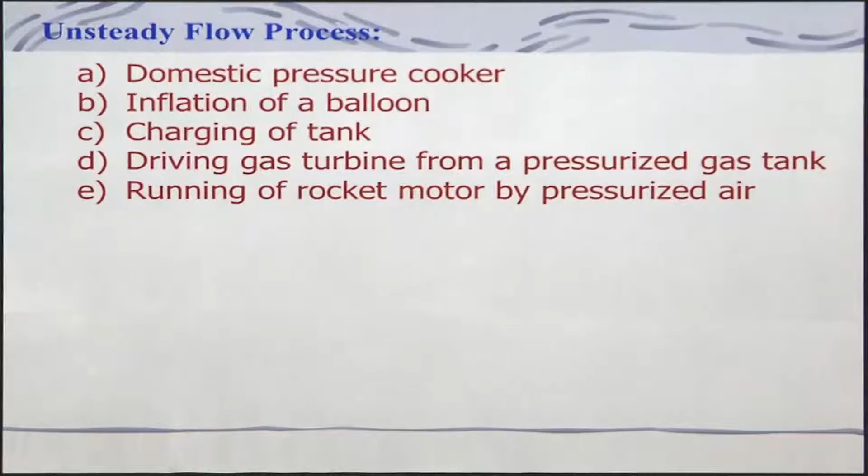So if you look at this typical pressure cooker being heated with some heat, and this is your pressure regulating valve, which you might have seen at home. Whenever the pressure builds up, because heat is there and let's say you're boiling water with a vegetable, it will be vaporizing, so these are basically vapors.

The pressure will build up, and when it reaches more than the weight you put on it, the pressure applied by the vapor creates a force higher than the weight, then the petcock or pressure regulator, which is weighted, will go up, and some amount of steam will be released. Then it comes back down, and again it builds up. So this is basically an unsteady process. Now this kind of thing we can apply in several other places.

You might be aware of a biogas plant, what we call gobar gas plant in village rural areas. Suppose I want to generate some gas, what will I have to do, and it should be at high pressure - how will I make pressure? There will be a dome, on which I put some weight, and the gas will be collected and the pressure will increase, and I can use that.

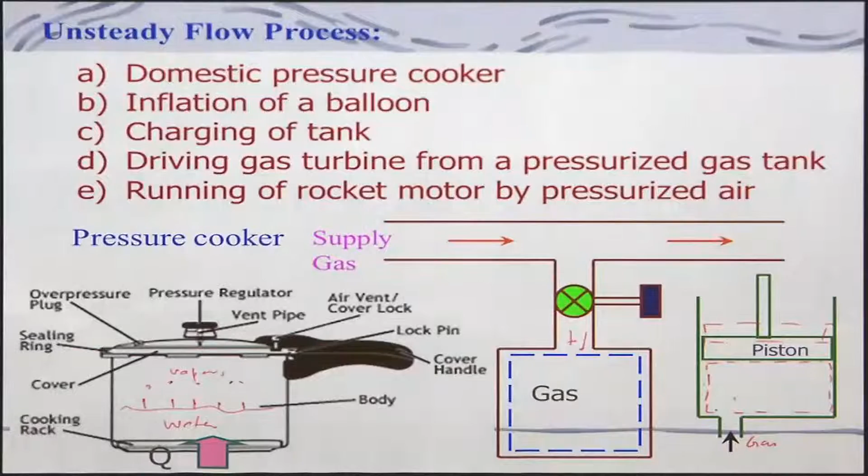And there is another thing coming up, basically the piston cylinder arrangement. Suppose there is a piston here, and you are putting some gas. In this case, if you take this control volume, it is changing its position as the gas is being filled and the pressure increases, so that piston will be moving. This is also another unsteady phenomenon which occurs in most of your automobile engines - air will be entering, and then it will be going out. So how we are going to model this is one question which we need to address.

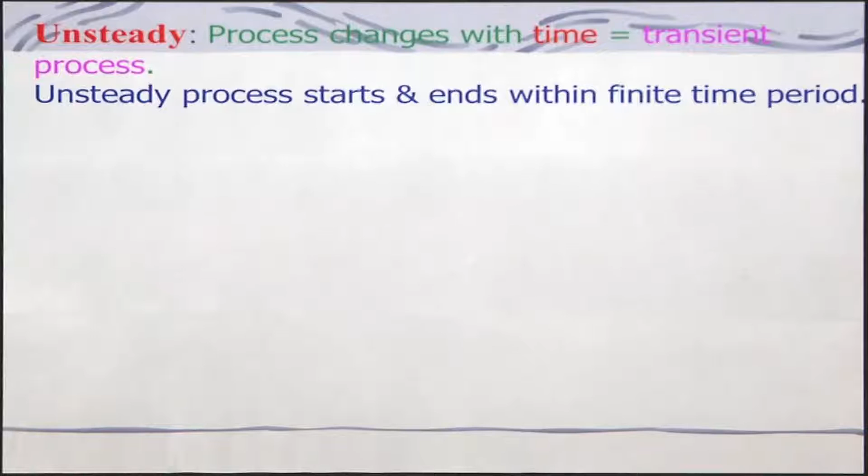So unsteady process means basically a process which changes with time, we call it also a transient process, and this unsteady process will be starting and ending within a certain finite time. It may be a few seconds, a few hours, or a few minutes.

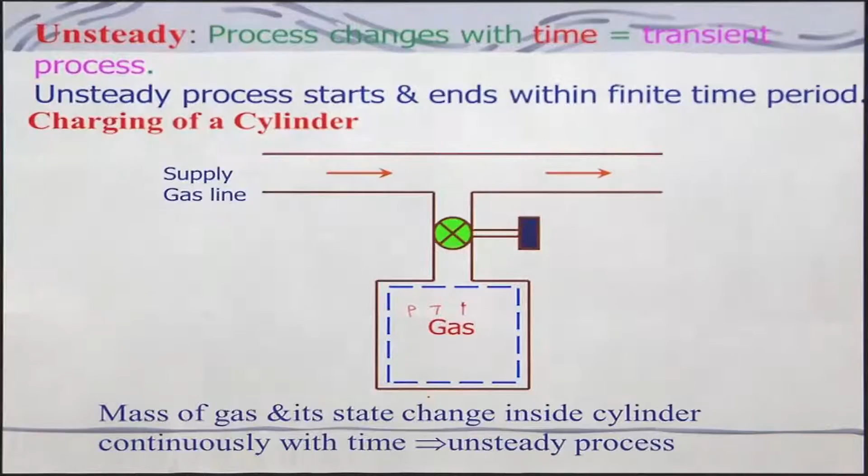As I told you, the charging of a cylinder is one of the examples one has to look at. In this case, the mass of the gas entering into this will be changing, and so also the pressure and temperature will be changing. If pressure increases, will the temperature increase or not - that one has to see. So basically the properties and the mass of the gas inside this cylinder will be changing continuously with time, and therefore we call it an unsteady process.

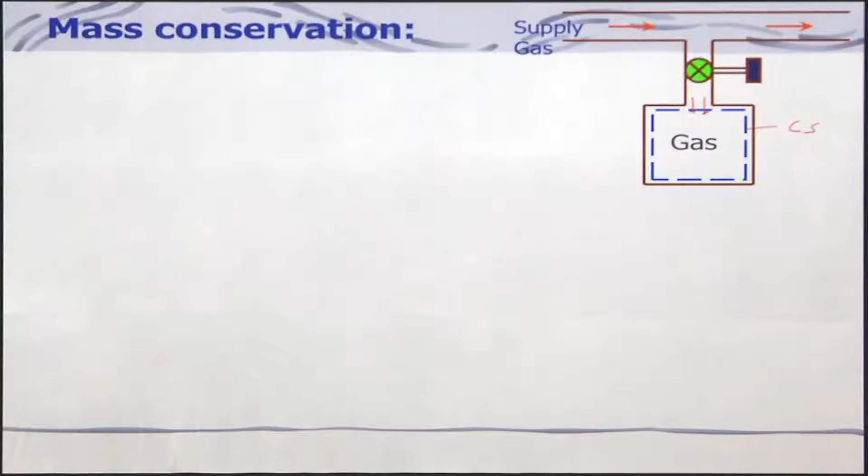So what we will do is apply basically the mass conservation equation. In this example of charging up a cylinder, I can take this as a control surface and this is my control volume. The mass will be entering here and it is not going out - this is my inlet, and there is no exit. So if I look at mass conservation, since there is no exit, this term will be zero.

Now similarly we will apply the energy conservation equation, which is for unsteady state. If you look at this term, in the steady state we had neglected it - this is your unsteady term. We had neglected this in case of steady state, saying it is zero, but here we cannot afford to say it is zero or neglect it - here we will have to consider that.

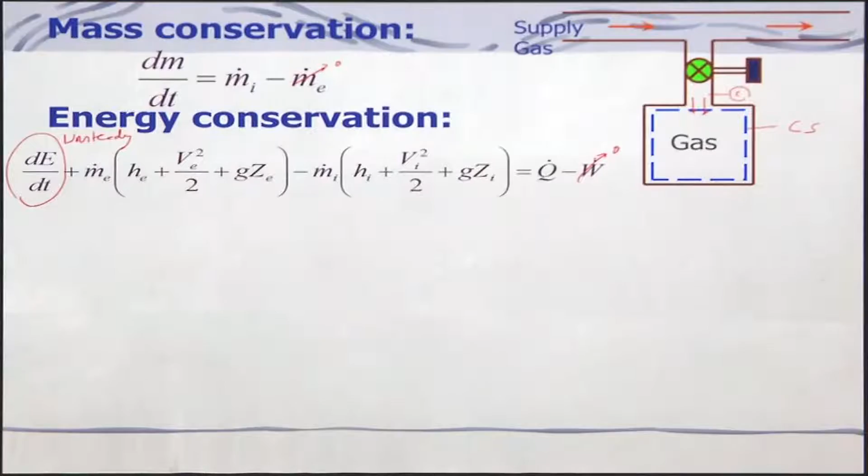And of course, if we consider in this case, is there any work done? There is no work done, it is a charging process, so this will be zero. We can assume it to be adiabatic, or we need not assume the process to be adiabatic. We will assume that the change in potential energy is equal to zero, for example this height is not really having much effect, so this potential energy change is zero. And we are saying the velocity with which it is entering into this chamber is very, very small - of course it will be finite, it cannot be zero, but it is small - so therefore the change in kinetic energy is basically zero.

We can write down the first law of thermodynamics for an open system: dE/dt minus m dot hi is equal to q dot. Here we are saying that it need not be adiabatic, but in some problems we may assume it to be adiabatic depending on the problem. Here we have kept that term with us.

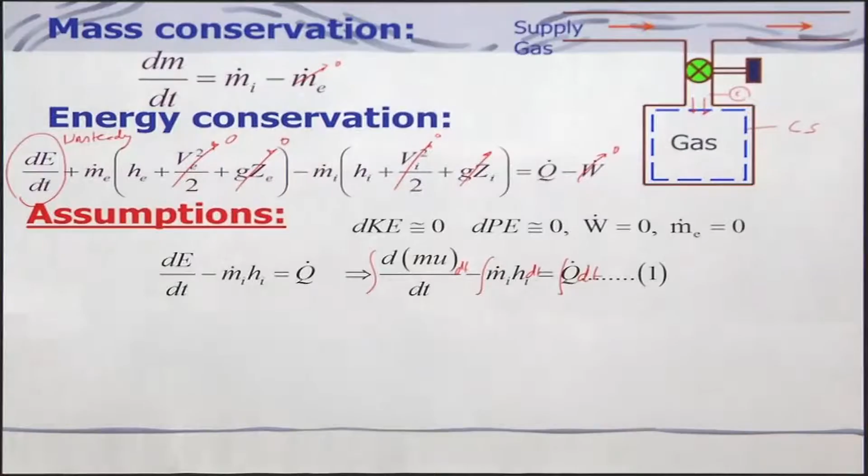Now we need to integrate this equation to find out. If I integrate this over dt, we can integrate between time 0 to t and see how we can change it. Keep in mind that m is the mass of the gas in the control volume at any instant of time, and U is the specific internal energy of the gas in the control volume at any instant of time, as already defined. So by integrating this equation, we get this.

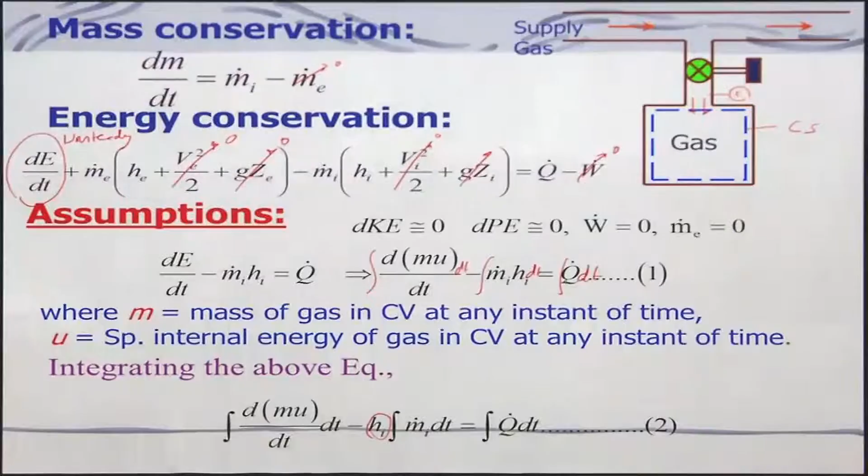Now we will have to see how we are going to integrate this, that is the important point. Keep in mind that in this term, I have taken the h, the hi, out. That means we are saying that whatever enthalpy with which it is entering the control volume is not changing with time. Is it a good assumption or a bad assumption? Because this supply is having a constant enthalpy, which is not changing, and heat loss is not really much, so there is not much change. Therefore I can take hi out, and we will look at each term of these and see how we can integrate.

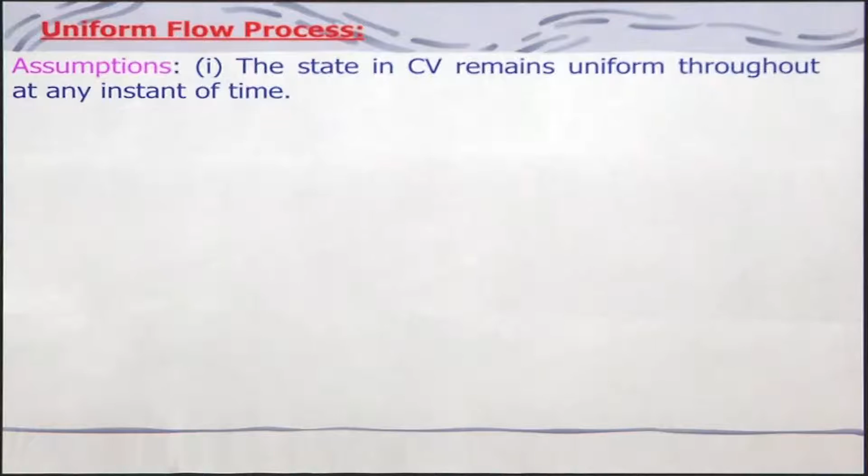Before that, we will consider uniform flow processes. Flow need not be uniform, but here we are assuming the uniform flow process, and the state in the control volume remains uniform throughout at any instant of time. For example, if some mass is entering here, and there is heat transfer taking place because it's not adiabatic, some heat will be going out on all sides. So what will happen? The temperature may change, right. But however, we are assuming that throughout this control volume - this is the control surface, this is my control volume - that is not changing. That is the assumption we have. Therefore we are calling it uniform, but in the actual situation it will not be.

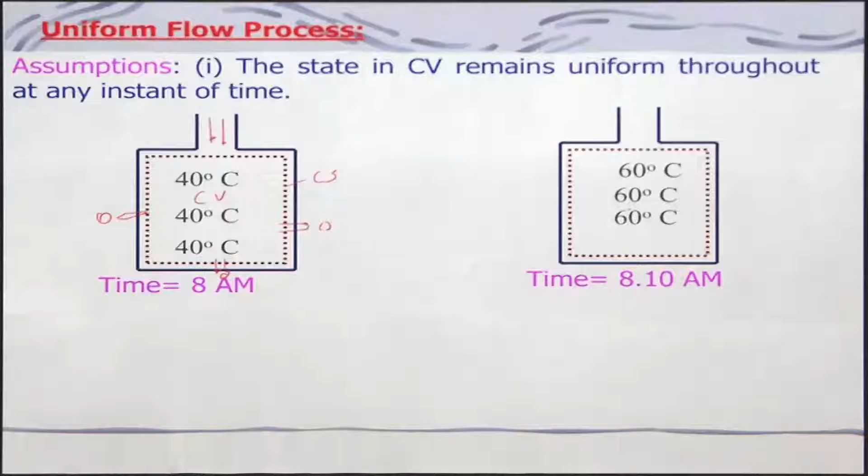So at the inlet, flow is assumed to be steady and uniform. For example, in a flow, if it is coming here, the flow profile can be like this. Yes or no? Because boundary layer will be there, it is a pipe. There will be a boundary layer, this is a wall surface, wall of the pipe. But however, what we will be assuming? We will be assuming a uniform velocity profile.

That means the profile will be uniform, all same velocity. If it is, let's say, a parabolic profile, then we will say average velocity, and we work it out, assuming uniform velocity at the inlet and uniform throughout. Keep in mind that in thermodynamics, most of the time we look at uniform velocity and temperature profile at the inlet and exit, unlike in fluid mechanics, where you can't afford to consider uniform. So in thermodynamics we will be doing this unless otherwise stated. If it is given as non-uniform, then you will have to handle it in a little different way.

So the state of the gas in the supply line remains constant. There is a supply line here which is not shown, this is your supply line, and this remains constant, that we are assuming.

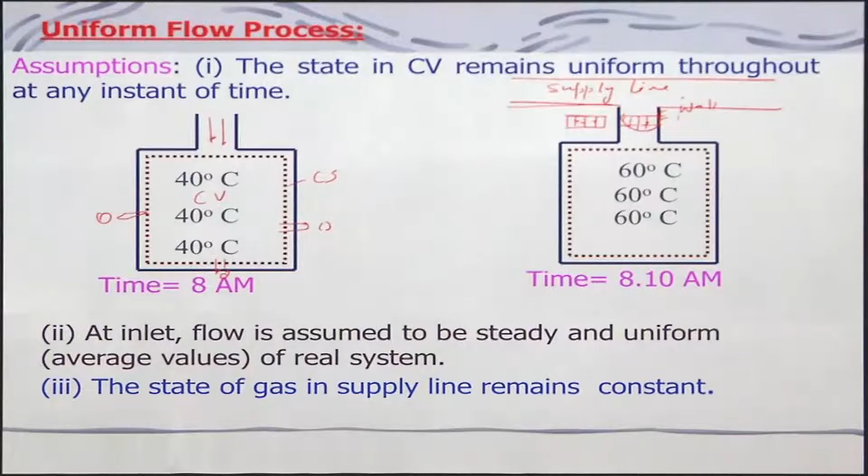Let us look at each term. If you consider this term and write it down, we will get, between the initial state and the final state, mf uf minus m naught u naught. That is the thing we get by integration.

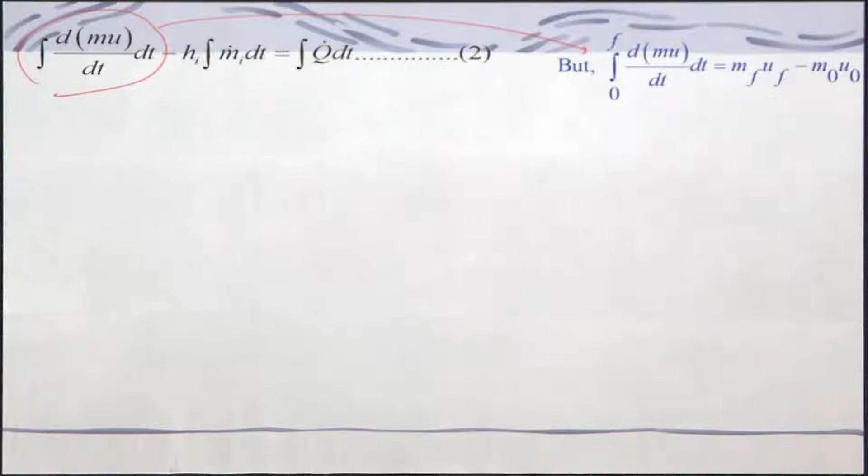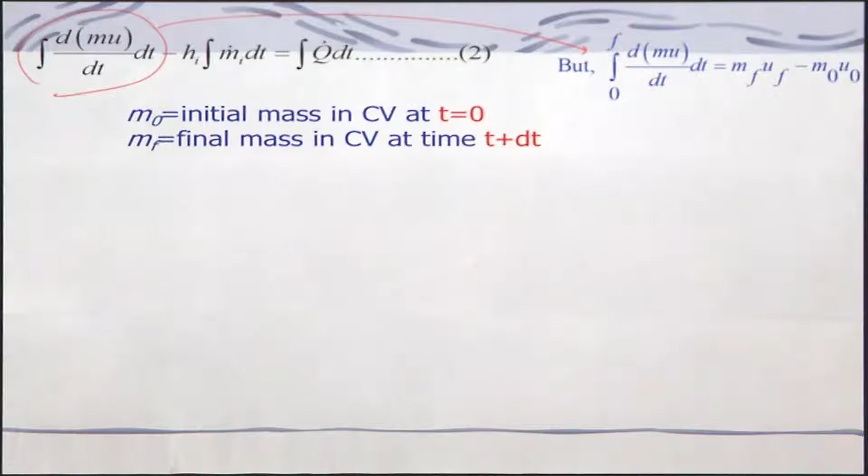Here m naught is the initial mass in the control volume at time t equal to 0, and mf is the final mass in the control volume at time t plus dt. Similarly, the internal energy is uf and u naught.

Now if you look at this term, q dot, I can take this out, and this is q dot dt integrated from 0 to final, which becomes q, the total heat transfer from the control volume during time dt.

Now we look at the last term. From mass conservation we know dm by dt is equal to m dot I. If you integrate this from 0 to f, you will find mf minus m naught. So this portion will be like that.

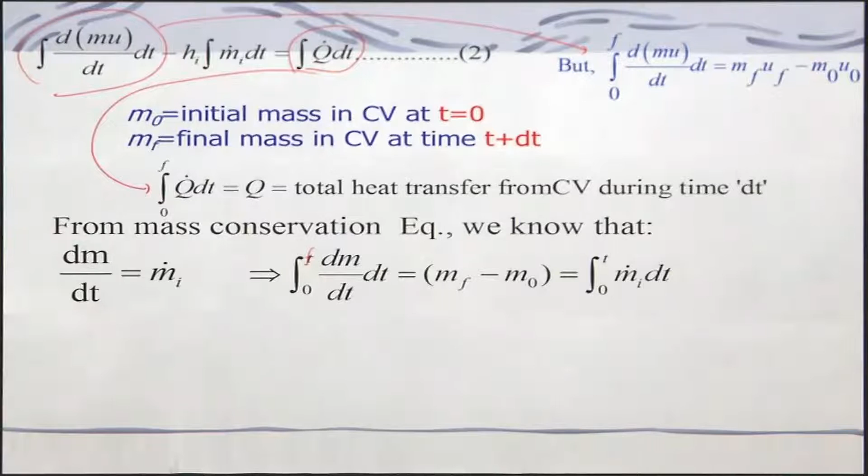So we substitute these values in equation 2, and we get that h m I dt, which is nothing but mf minus m naught h I, is equal to the change in internal energy terms, that is mf uf minus m naught u naught, minus q dot dt, which is basically q.

So what this says is that the change in the amount of mass in the cylinder multiplied by the enthalpy is equal to the change in internal energy, final minus initial, minus q. For an adiabatic process, you can make this term 0.

The q will be 0, so this term will be 0, and you will find that the enthalpy change in the cylinder is equal to the change in internal energy, kind of thing one can think of.

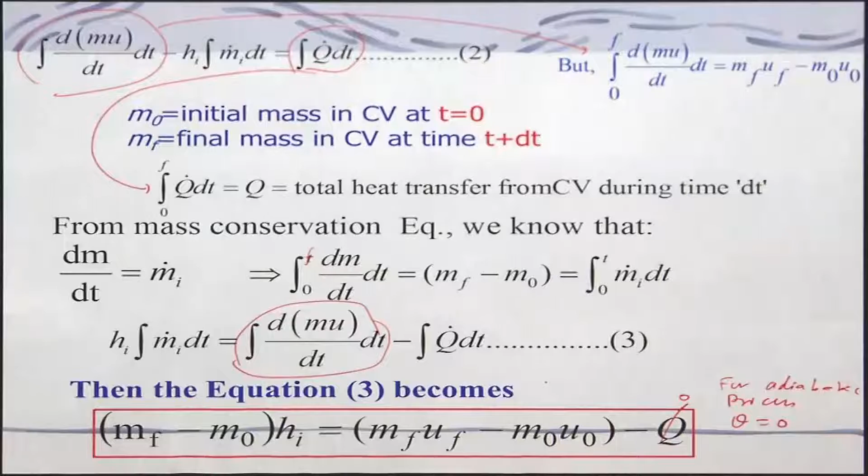Now let us look at the discharging of gas from a cylinder. Earlier we have seen the charging of a cylinder, now we will be looking at discharging of a cylinder.

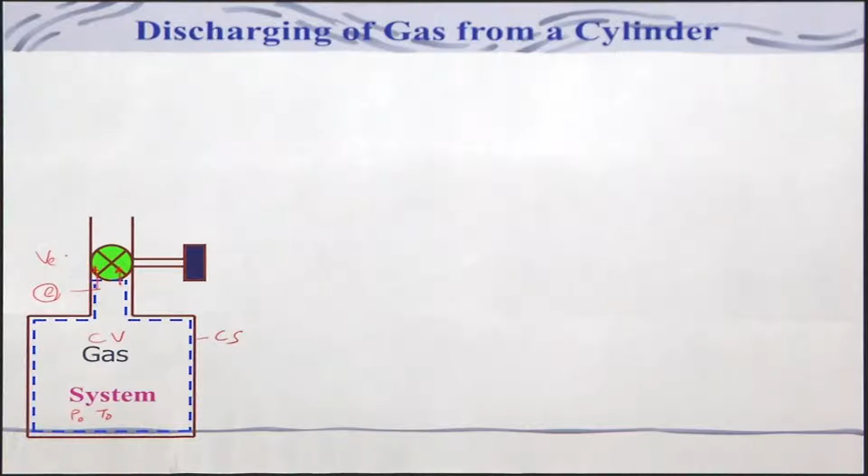In this case, we consider a gas at certain initial pressure P naught and temperature T naught, going out through this valve. This is the control volume, this is the control surface, and it is exiting with a certain velocity VE.

As the gas goes out, the pressure and temperature of the gas in the cylinder will be decreasing with time, and the mass contained in the cylinder will also be decreasing, so it is an unsteady process.

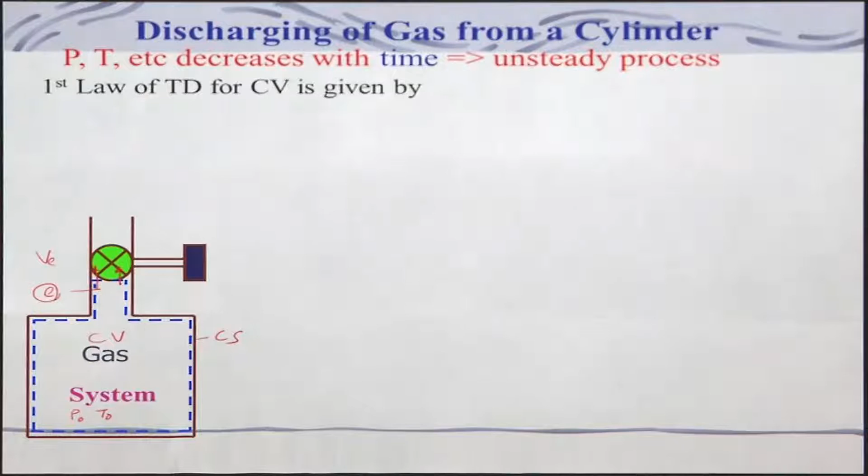We take a control volume and apply the first law of thermodynamics. We already know there is no work being done during this process, on the system or by the system, so the work done will be 0, and the change in potential energy will be 0. There is no inlet.

So this portion will be 0, and if you look at the m dot I, this will also be 0, so this term will not be there.

However, the gas will be having a certain velocity with which it is going out. So the energy equation becomes d by dt plus m dot E into hE, the enthalpy with which it is exiting, plus V square divided by 2, is equal to Q dot.

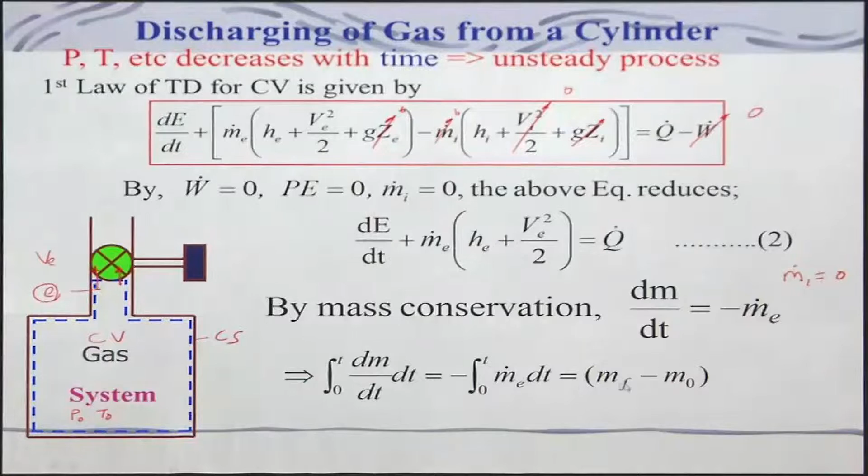We will have to integrate this equation, but first look at mass conservation: dm by dt is equal to minus m dot E, since m dot I is 0. So it becomes dm dt equal to minus m dot E, and if we integrate this from 0 to t, you get mf minus m naught.

So now we will try to integrate the energy equation, integrating between time 0 and certain time t, and we look at each term. Already we have done this, it will be similar, d by dt is nothing but mf and uf minus m naught u naught, and in a similar way we can also integrate m dot e.

h e plus v square divided by 2, this into dt, and we are assuming that this term, h e plus v square by 2, is not changing with respect to time. Therefore, I will take it out and we will get m naught minus m f into h e plus v square divided by 2.

Keep in mind that here I have taken a minus sign because the mass is going out, in other words the mass of the cylinder is decreasing. Therefore the negative sign is taken, so it became positive kind of thing here.

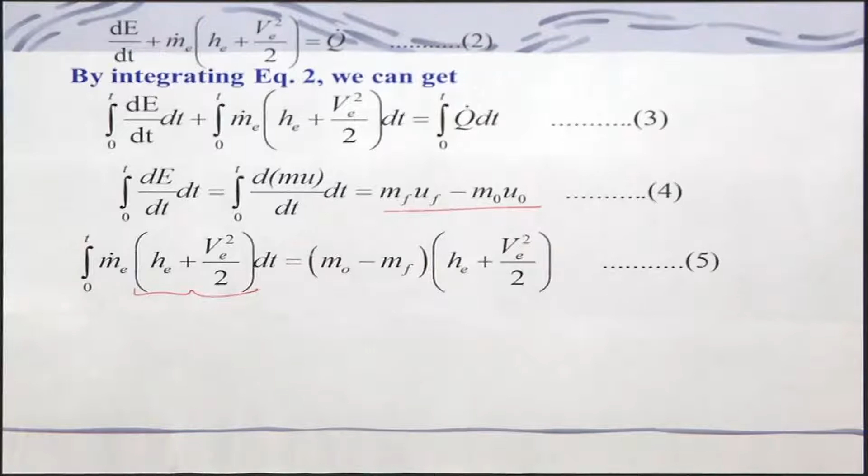This assumption, if you look at it, is not really right unless you are taking out a very small amount of mass from the cylinder which is at high pressure and high temperature. The amount of mass in the cylinder is very high and you are taking a very small amount, so velocity will not be changing because pressure is not falling drastically. Otherwise velocity will be changing because it is going to, say, ambient pressure. Then the pressure of the cylinder is changing while ambient remains the same, so the pressure gradient changes and velocity has to change, but we are assuming it is not changing with respect to time for simplification. You should keep that in mind.

So equation 3 becomes m naught minus m f into h e plus v square divided by 2 is equal to q plus m naught u naught minus m f u f. So this is the equation you get for the discharging of a cylinder. It is similar to before, except that we are considering a little kinetic energy, the exit velocity here, that's all, not really much.

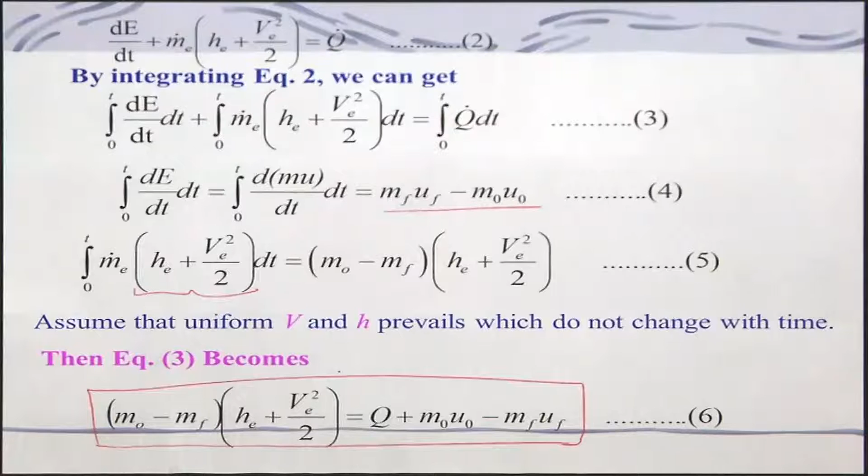So this way you can handle these problems. Let me tell you, suppose here we have assumed a control volume approach for charging and discharging of a cylinder, an unsteady process. Suppose I want to use the control mass system, a closed system, and analyze this problem. Is it possible or not? Can I arrive at the same equation or not?

It is possible, you can do that, and I would suggest you do it yourself and get a feel for it, because it is important to appreciate that for any thermodynamic problem you can use either a control volume or a control mass system approach. However, one has to be a little careful, and sometimes one will be more convenient for a certain kind of problem, for example control volume approach is convenient. That does not mean you cannot apply the control mass system there. So you should keep that in mind.

Let us see another application of these open flow problems, that is the heat exchanger. A heat exchanger is used routinely in industries to have a heat exchange between two fluids, without really getting mixed, that is the thing. But there might be another place where the fluid will be mixed together, like a mixture.

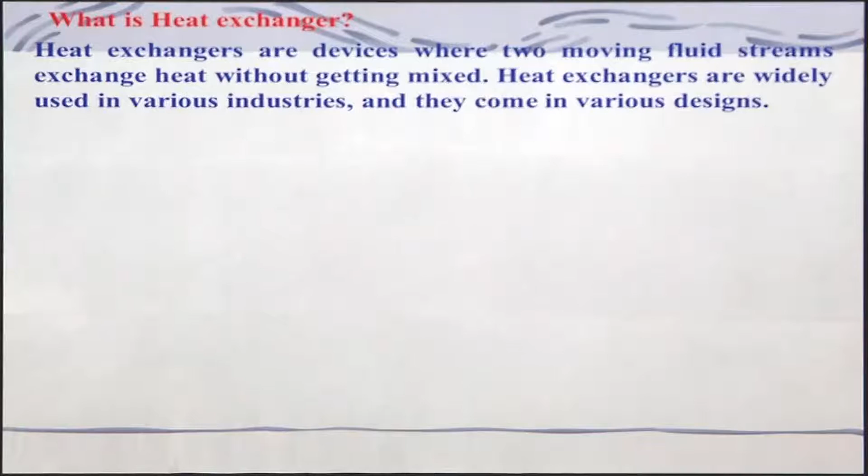What we do in the shower, whenever you take a bath in the winter season, hot water and cold water with the help of a tap or something you will be mixing to get water which is moderate enough for your body. Otherwise, if you take water directly from your geyser, it will be a problem, unless it is controlled properly. So heat exchangers are widely used in various industries, and there are various kinds depending upon the application and also depending upon what the designer can think of.

If you look at applications, there are several, like your cooler, the desert cooler we use. Can you think of a desert cooler as a heat exchanger? In this definition, it is not really, right. It would rather come under a mixture.

And like heater, radiators in the car, that is a very good heat exchanger. In recuperative kind of combustors, we do exchange heat so that you can preheat your air and other things. Of course power plant, refrigeration system, several. Heat exchanger is a very important component that people use in industries and other places.

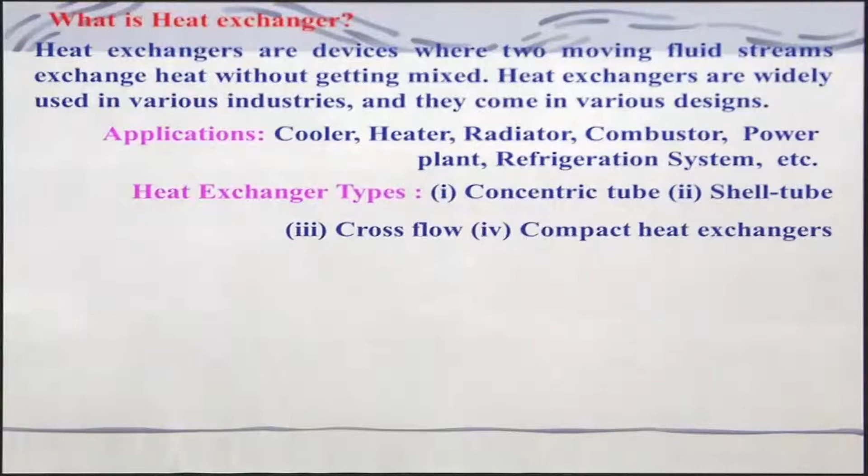So heat exchangers can be of several types: concentric tube type, shell and tube type, cross flow type, compact heat exchanger. I mean several of them one can think of. Those people who are in mechanical engineering will be learning about heat exchangers in detail.

So let us consider a shell and tube type kind of heat exchanger, like a concentric tube type heat exchanger, in which fluid A is coming in at 20 degrees Celsius and leaving at 50 degrees Celsius, because fluid B which is entering comes into contact with the hot fluid which is at 70 degrees Celsius, and it is leaving at 35 degrees Celsius, because there is a heat exchange taking place without really getting mixed.

Now, if you want to analyze this problem, you will have to take care of how to take a control volume of that. See, this is a simpler kind of system.

So let us look at another kind of heat exchanger, where if you look at the cold water, it is coming over here and going through the tube, through these tubes. Again it is coming to another chamber and it is again going back.

And then the steam, which is at high temperature, will be coming - these are the baffles, so that it will give more resistance - again pass through this way, and this way, again through these, so that more contact, more residence time is given and heat exchange happens. This is basically a complex kind of heat exchanger.

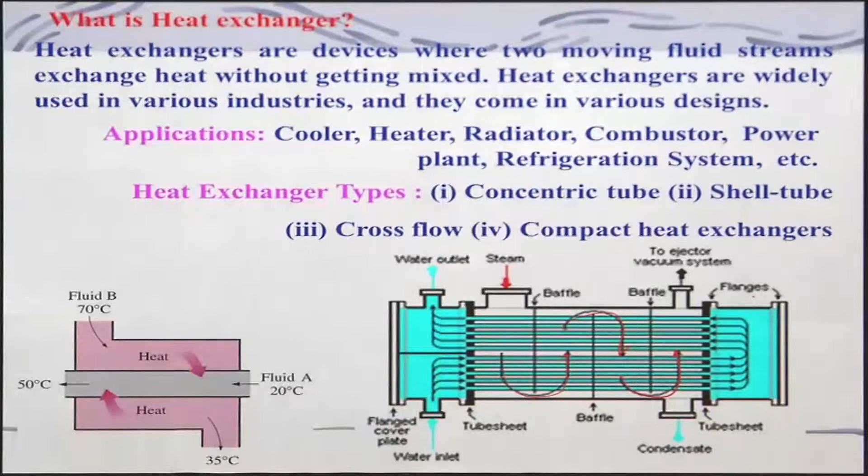If you want to analyze this kind of problem, you will have to simplify things. Let us now look at a concentric tube heat exchanger. One can think of using two control volumes: in this case, this is your control volume boundary, which includes both the cold fluid pipe and also the hot fluid pipe.

In this case, if I take this as a system, we will consider the heat exchange in this control volume to be 0. But if I take the same example, choosing this control volume instead, then you will have to consider how much heat is passing through this surface - there will be some heat passing through this control volume, and you will have to take care of that.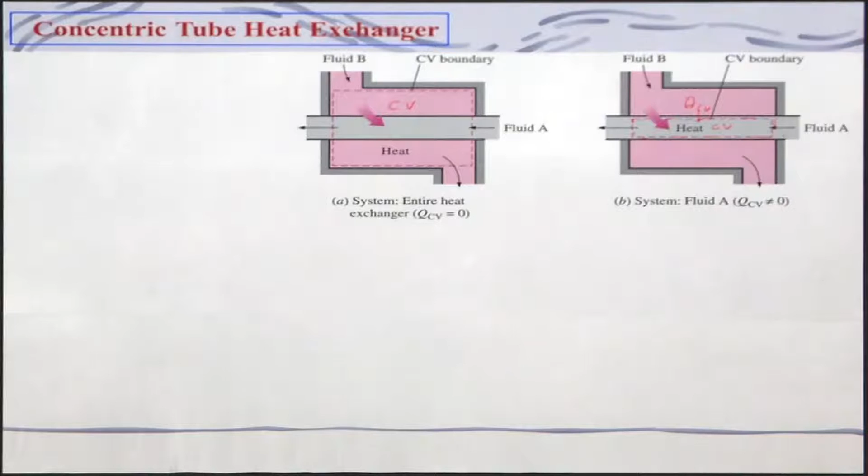So what I am trying to emphasize here is that whenever you choose a control volume for a particular analysis, you will have to be very careful to handle things, right. Otherwise, you will be in trouble.

So let us consider this: fluid 1 is passing through this with a certain m dot at the inlet, and this is with the enthalpy at the inlet for fluid 1. Similarly, fluid 2 is entering with a certain mass flow rate and enthalpy, and it is being cooled down, and this heat is being transferred to the cold fluid, increasing its temperature.

So if you look at it, we are taking this as a control volume, as a result there is no heat being transferred - Q dot is basically equal to 0, because all the heat exchange is from fluid 2 to fluid 1.

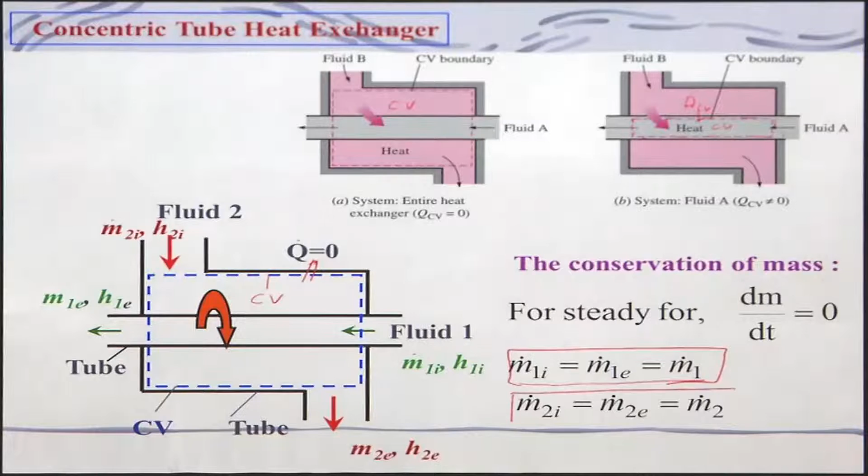So, mass conservation equation we can get, because this is a steady flow process. So, dm/dt is equal to 0. Therefore, mass flow rate at the inlet for fluid 1 is equal to mass flow rate at the exit for fluid 1, equal to m dot 1. Similarly, for fluid 2, m dot 2 inlet is equal to m dot 2 exit, equal to m dot 2.

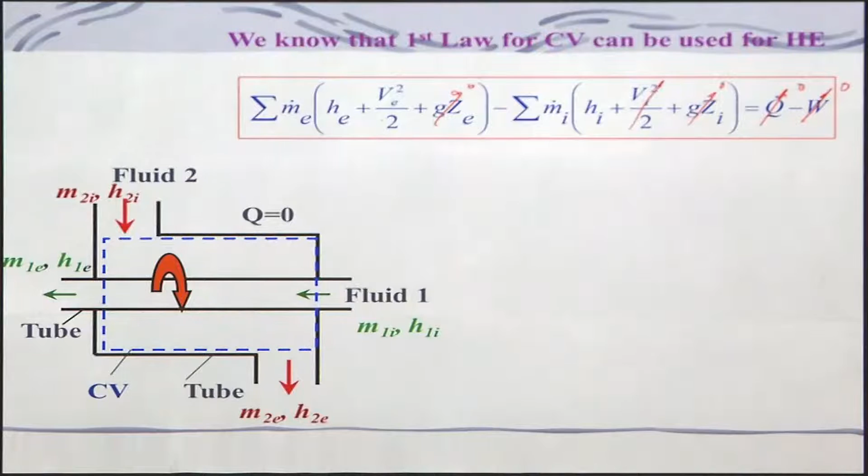Now we will apply the first law of thermodynamics for this control volume. We make these assumptions: the change in potential energy is 0, and there is no work done. What about heat? There is no heat exchange between the control volume, because both fluids are embedded in that control volume, so that will be 0, and the change in kinetic energy is also equal to 0.

So, therefore, you can get the first law of thermodynamics as very simple, that is enthalpy balance: the total enthalpy for fluid 1 at the exit plus the total enthalpy for fluid 2 at the exit is equal to the total enthalpy at the inlet for fluid 1 and fluid 2. That is all, basically enthalpy balance, nothing else.

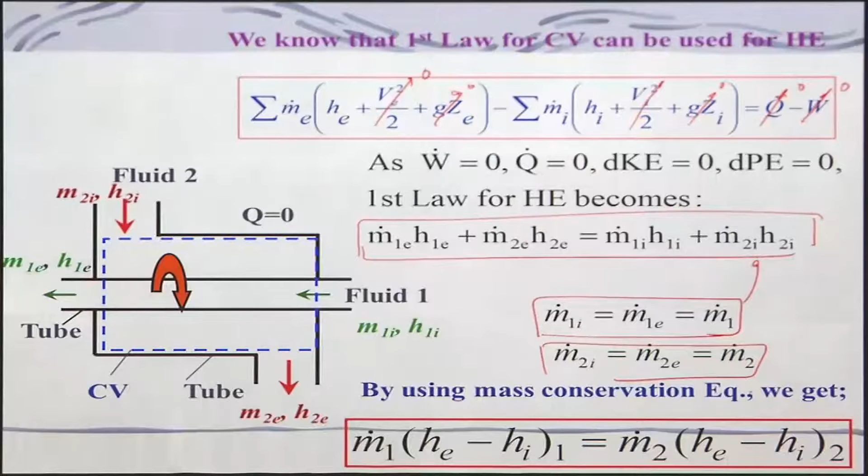And from the mass conservation equation, we already know this. So what we will do is put this equation here and simplify, and we can write m dot 1 into He minus Hi for fluid 1. That means the total enthalpy of fluid 1 is equal to total enthalpy for fluid 2. It's a very simple way of looking at it. You need not really derive this equation to see it, but if you keep it and do that balance, it will be good enough.

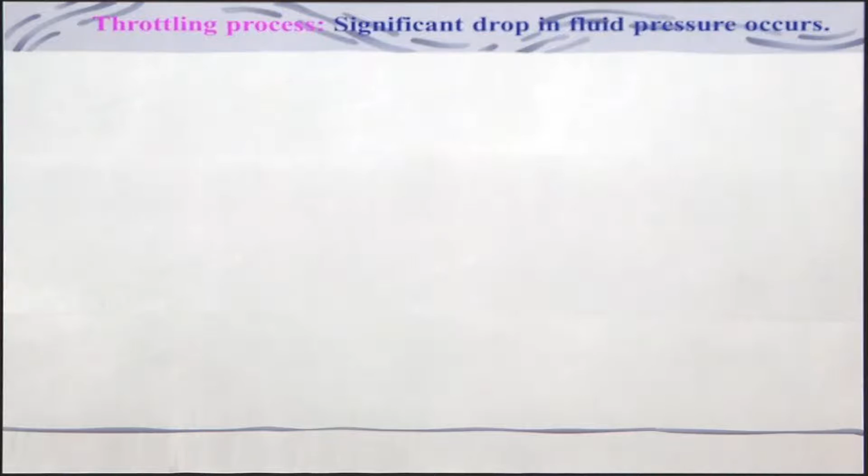So, let us look at another process, what we call a throttling process. In this case, there will be significant drop in fluid pressure. Where will these processes occur? Any idea? Because there will be significant pressure drop.

For example, you have already seen the turbine. In the turbine, or in the compressor, there will be significant pressure drop, right? Yes or no? See, if you look at a fan, the pressure will be increasing a little bit. Pressure drop means basically pressure will be decreasing in this case. So it will be in the case of turbine, there will be significant drop in the pressure. But however, we are not discussing about that.

Here we are discussing about a valve. Like suppose there is a discharge from a high pressure gas cylinder, and when I open that valve, there is a lot of pressure difference. In a cylinder of, let us say, nitrogen gas or hydrogen gas, it will be let us say 100 atmospheric pressure or maybe 500 atmospheric pressure, and then changing it to 1 atmosphere is a very significant drop, from let us say 500 atmospheric to 1 atmospheric pressure. So that drop will occur across a valve, because there will be a control valve which will be controlling the thing.

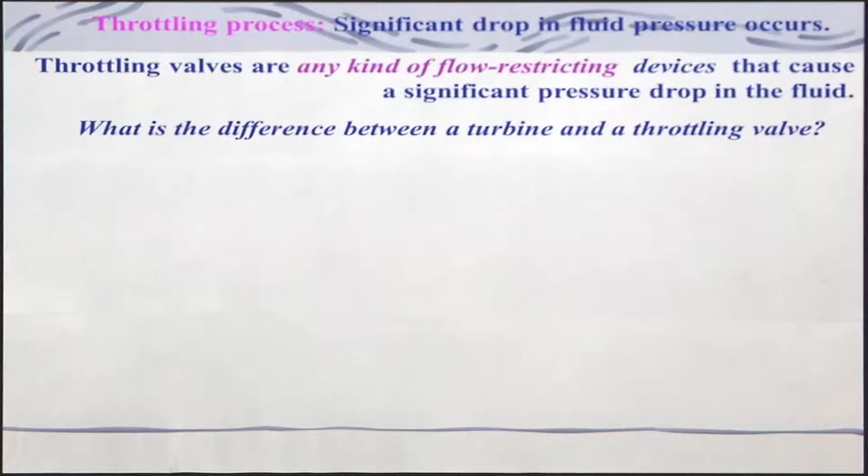So, throttling valves are any kind of flow restriction device that causes significant pressure drop in the fluid. And as I told, what is the difference between a turbine and a throttling valve? In the turbine, if there is a pressure drop, there will be work done, right? That means mechanical work being done. But in this case, there is no work done as such, because if you look at the discharging of a gas from a high pressure cylinder going out, there won't be any work done as such.

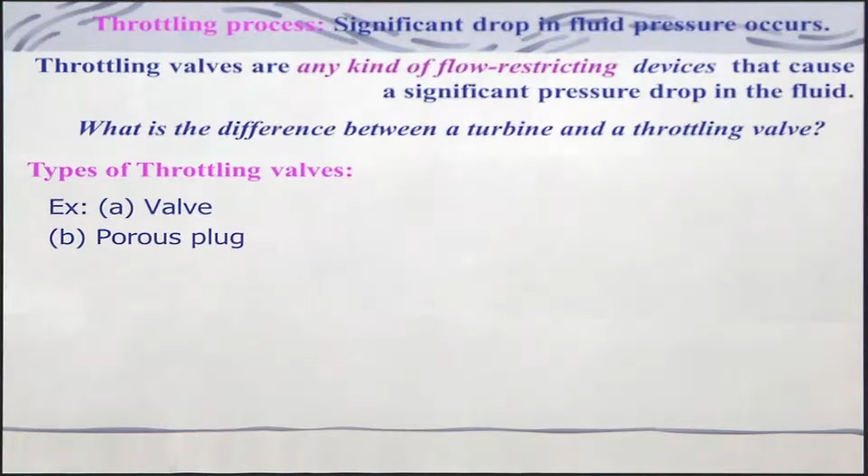So there are various kinds of throttling valves which you will be knowing, but let me just tell you a few of them. One is the valve, like when it is open or half open, there will be a throttling process with significant pressure drop. There is a porous plug, and there is a capillary tube. You might be knowing what a capillary tube is, right? It is a very thin tube, small diameter, thin wall, like your hypodermic needle, whatever you use for injection, that can be used as a capillary tube as such.

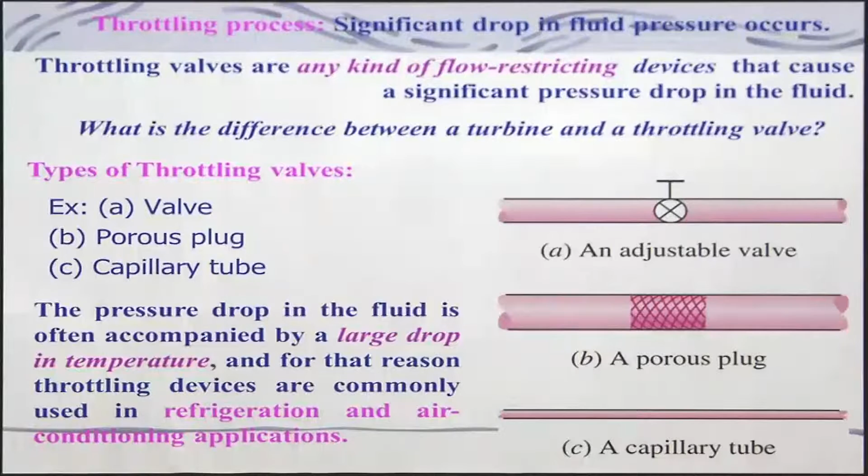For that reason, throttling devices are commonly used in refrigeration and air conditioning systems. Did you ever observe, maybe in your chemistry lab, when you open a high pressure gas cylinder, particularly in winter, that condensation occurs across that tube? Have any of you observed this? You have not seen? Please observe it whenever you do such experiments.

Why does this happen? Because the temperature comes down very low, and the moisture in the atmospheric air condenses on top of it, and you can see that. So that is why it is being used.

You must have seen your refrigerators. There will be a throttling valve, and you see there is a capillary tube being used to reduce the pressure, so that you get the cooling effect.

This experiment was basically done first by Joule and also Thomson. What they did: there is a porous plug one can consider, and there is a high pressure P at the inlet, Pi, and temperature Ti. Of course it will have some enthalpy of the fluid, and when it passes through, the pressure Pe will be reduced, and temperature Te may change - it may be reduced or it may be enhanced - and the enthalpy also will be changing at the exit.

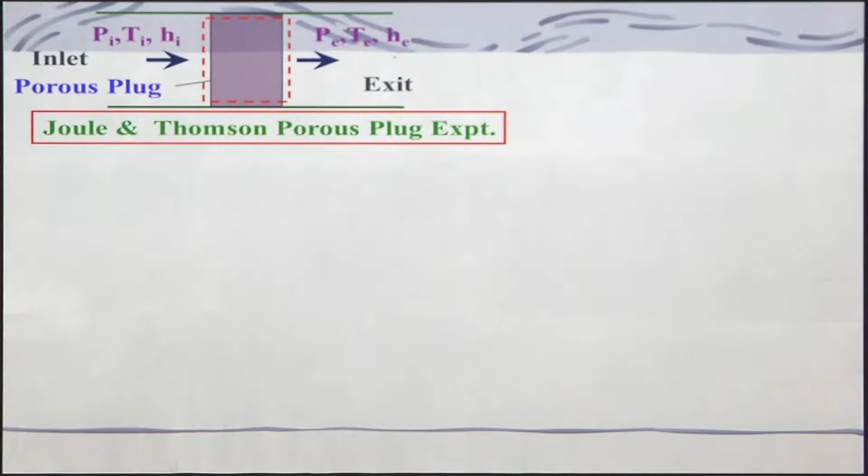So we make this assumption: if I take this control volume for the porous plug here, this is my control volume. What will happen - is there any heat going through? If you look at this, it's very small, so heat transfer will be 0, there will not be any heat transfer, and there is no work done. Therefore the shaft work will be 0, and we are saying the change in kinetic energy is 0, because there will not be much velocity change occurring, and the change in potential energy is also equal to 0.

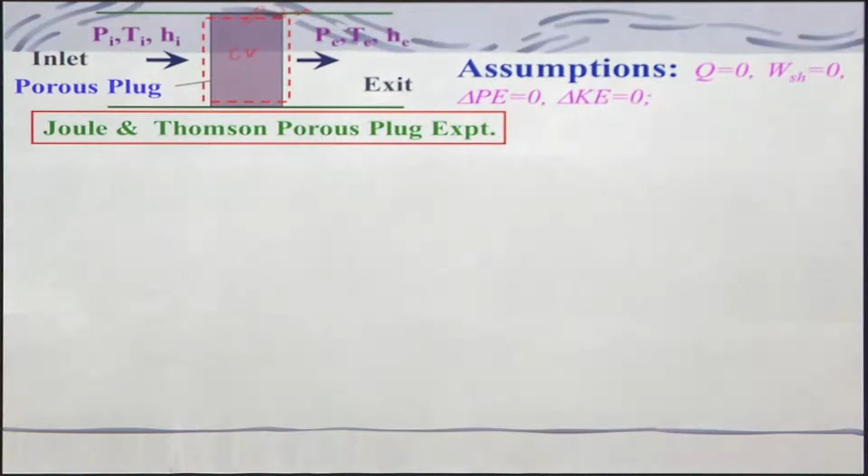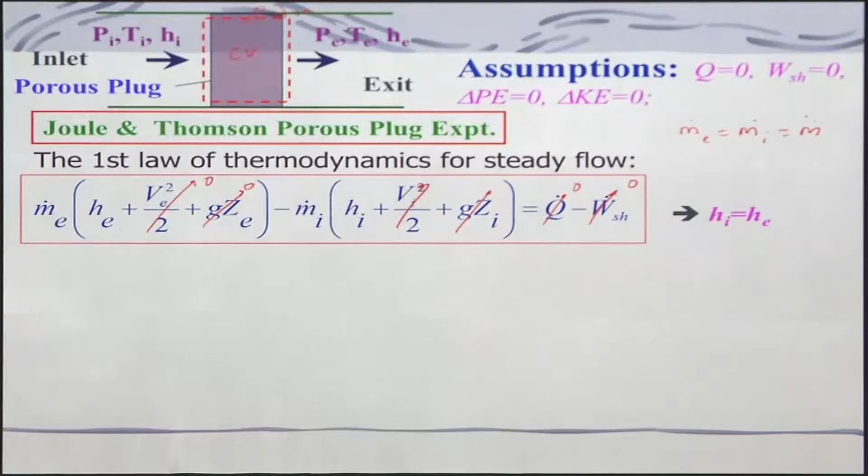We can assume this process to be steady, with no unsteadiness. With this assumption one can use this equation, and since the change in potential energy is 0 and change in kinetic energy is equal to 0, what it amounts to is that enthalpy Hi is equal to He. From the mass conservation equation we can write that m dot E is equal to m dot I is equal to m dot. Therefore either the specific enthalpy or the total enthalpy is remaining constant.

We have seen a similar thing in the heat exchanger, and this process is known as an isenthalpic process. Throttling is basically an isenthalpic process.

So if I rewrite this enthalpy in terms of internal energy, you can say this is basically internal energy, and this is the flow work, at the inlet, equal to again the internal energy and the flow work at the exit.

If you consider that PeVe, the flow work at the exit, is greater than the flow work at the inlet, then Ue, the internal energy at the exit, will be less than Ui, and if you assume Cv is not really changing much with temperature change, then you can say Te is less than Ti. Similarly, if the flow work at the exit is less than the flow work at the inlet, the other way around, the internal energy at the exit will be greater than the internal energy at the inlet, and the exit temperature will be greater than Ti.

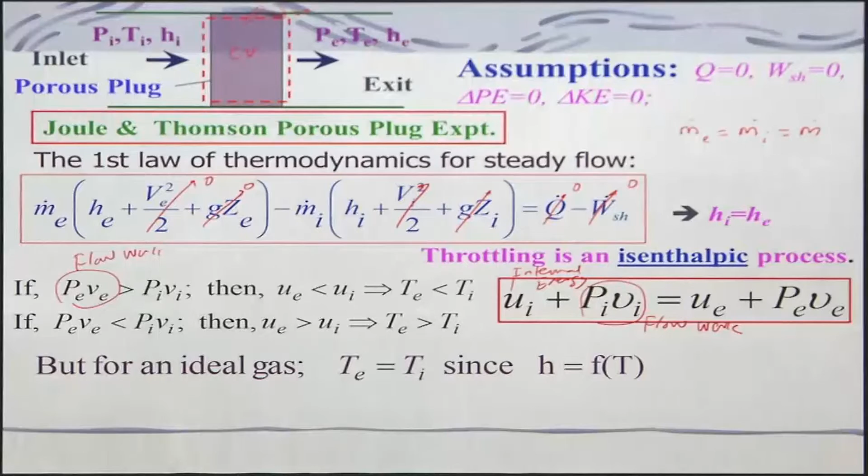But for an ideal gas, we know that Te is equal to Ti, because the enthalpy is a function of temperature only.

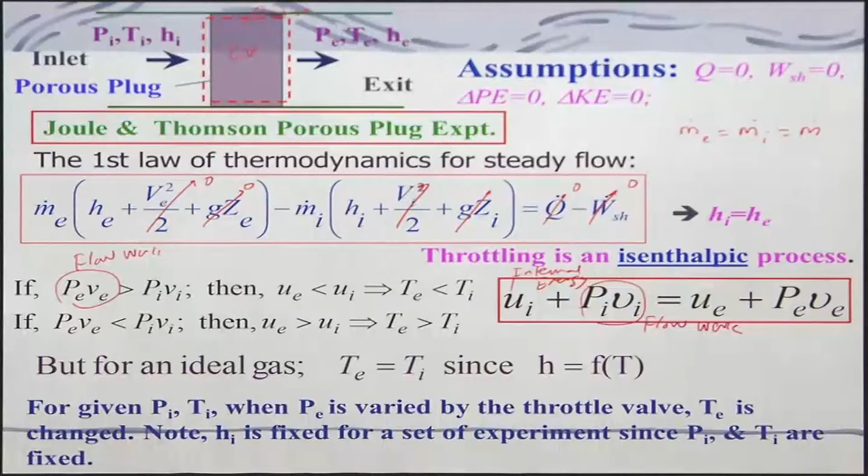As I told, they conducted experiments by keeping Pi and Ti constant, and then varying Pe using the throttling valve. So if you conduct these experiments, taking this Pi and then varying Pe, you will get different temperatures.

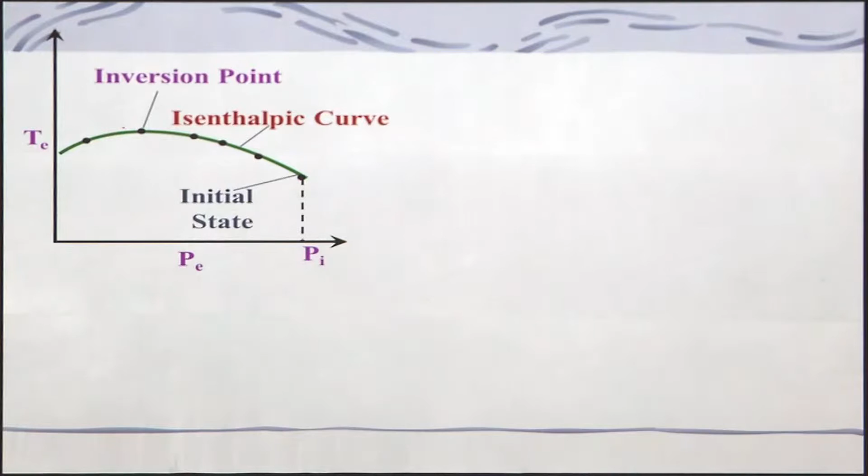You will find it is increasing, then it remains almost unchanged, and then again it is decreasing - this is the inversion point, because the slope changes from the right hand side to the left hand side. If you conduct this experiment several times at different inlet conditions, you get various curves, and if you join these inversion points, like where the slope is 0, what will happen? This curve is known as the inversion curve.

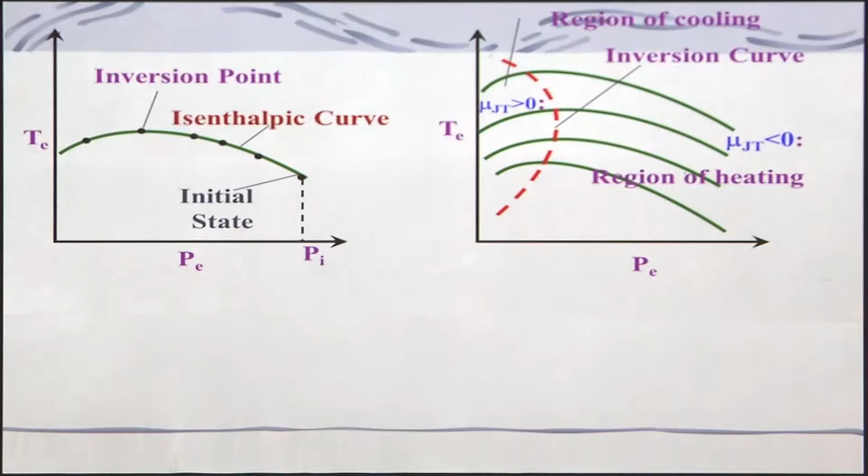So we can define a term, the Joule-Thomson coefficient, mu Jt, as dou T by dou P, with H (enthalpy) remaining constant. This is a property of the system being used, and we will also discuss how to evaluate this in terms of measurable properties later.

So if you look at this point joining, this is a maximum inversion point, and if you join over here, that is the corresponding temperature.

Consider mu Jt equal to Te minus Ti divided by Pe minus Pi. When mu Jt is greater than 0, in this region, what happens? Pe is less than Pi all the time, because pressure will be lower. So then Te is less than Ti, therefore this is the cooling region.

And when mu Jt is less than 0, in this region, Pe is less than Pi and Te is greater than Ti - this is the heating region.

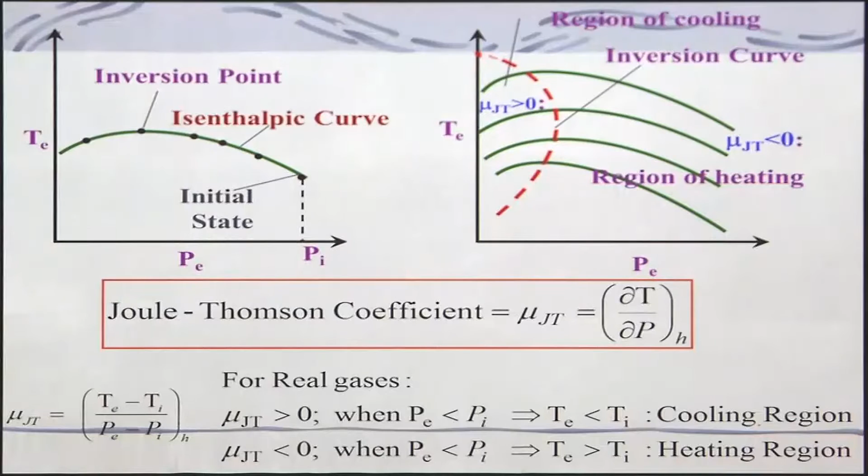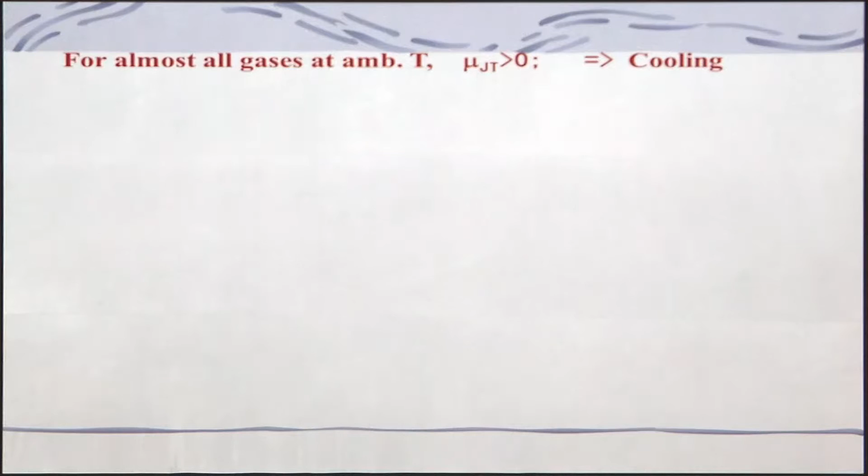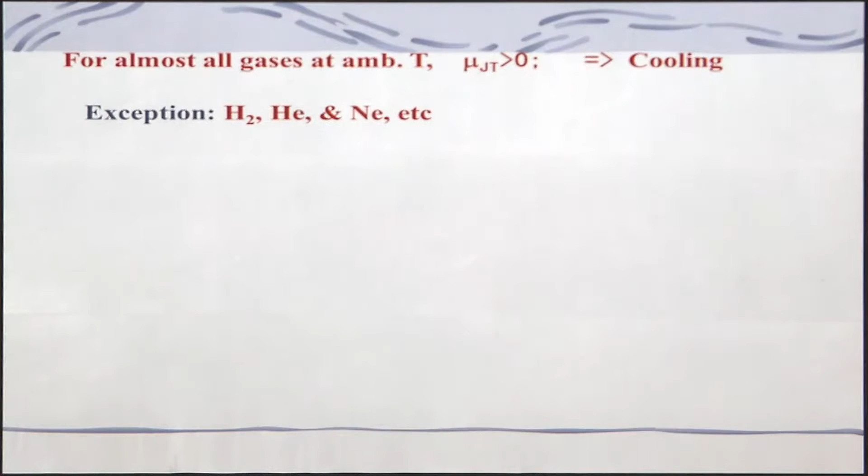As I told, particularly when you handle hydrogen kind of gas, you get this heating up. Therefore one has to be careful when handling hydrogen cylinders. For almost all gases at ambient temperature, mu Jt is greater than 0, that is cooling - with the exception of hydrogen, helium and neon. Of course helium and neon are inert gases, so there's no problem, but hydrogen is a very reactive gas.

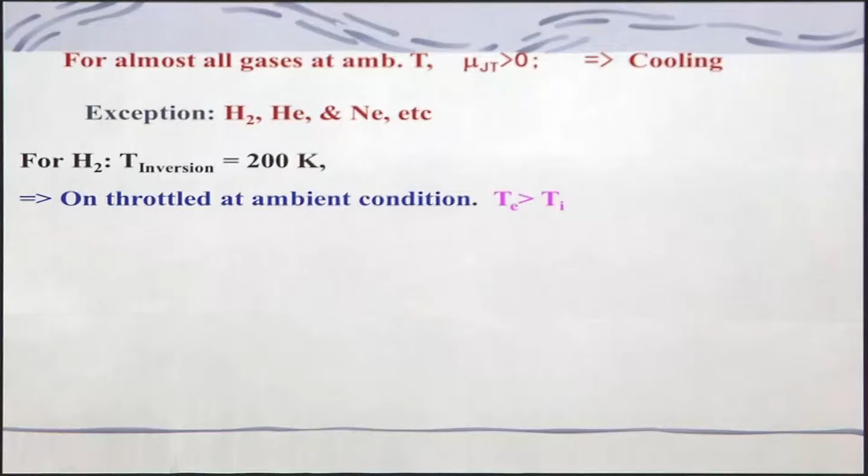For hydrogen, the inversion temperature is around 200 Kelvin. So on throttling at ambient temperature, Te is greater than Ti - if there is higher temperature and a leakage, it may ignite the mixture around that place, causing explosive kind of things. So one has to be very careful handling the hydrogen cylinder to avoid explosion.

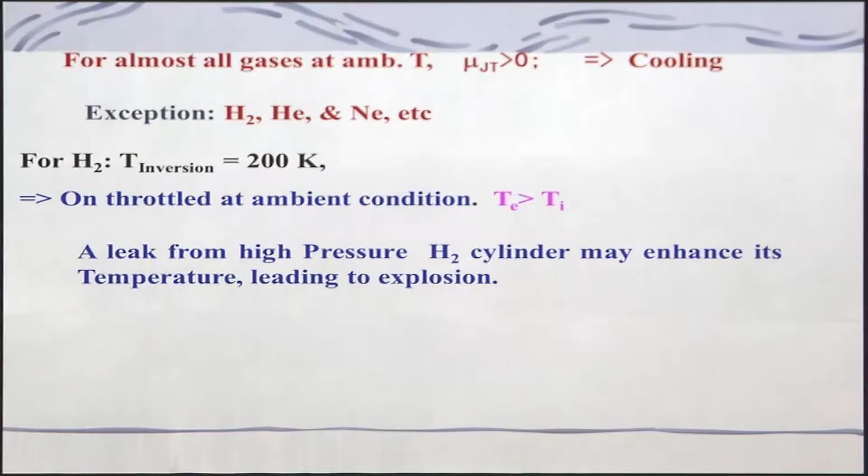So knowledge of the inversion curve for real gases is essential to design refrigeration and liquefaction systems. Therefore one has to understand these properties of the Joule-Thomson coefficient, which we will also discuss and express in terms of measurable properties when we talk about handling various properties.

So for an ideal gas throttling process, Te is equal to Ti, that means the Joule-Thomson coefficient is equal to 0.

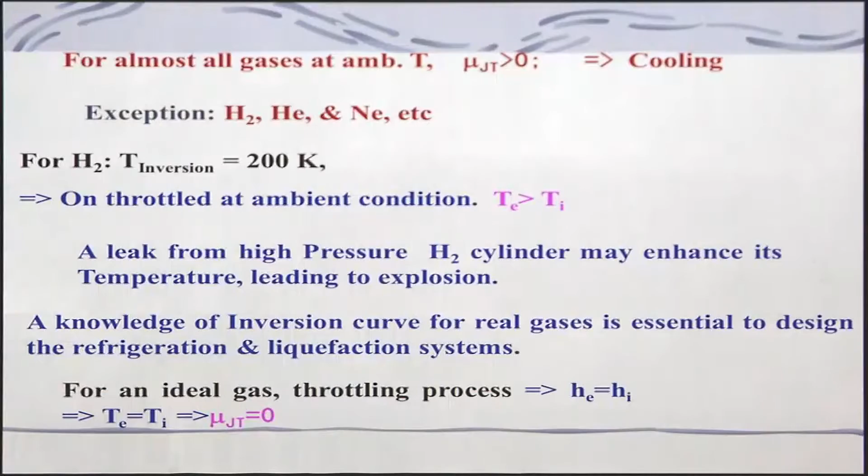So we have seen how you can apply the first law of thermodynamics for open systems, and in this case there is no reacting flow - no reactions are going on. In the next lecture, we will learn how to handle reacting flow. In this case, the heat exchanger, compressor, turbine and other problems we have seen, as in unsteady cases, have no reaction going on, no heat release, no chemical reaction - these are simpler fluids.

We will have to see how we can apply the first law of thermodynamics for reacting flow in the next lecture. Thank you.